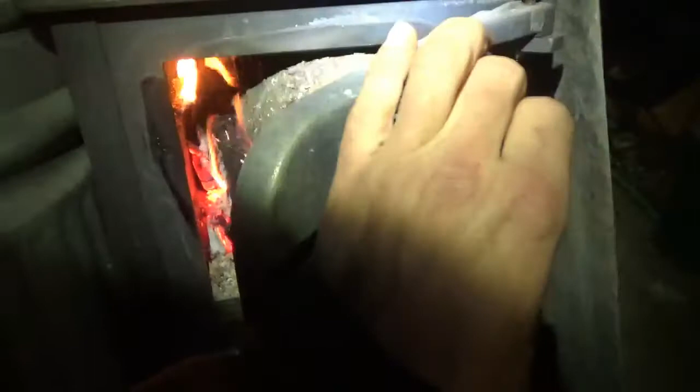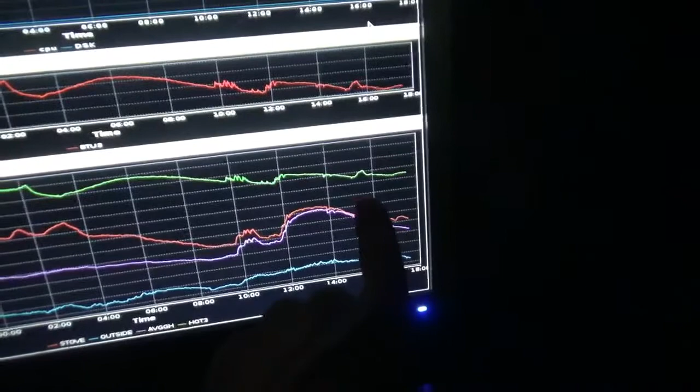Guess we'll just look at the chart here quick. I'll shut the headlight off. You can see here where I stoked it up, and you can see where the stove temp went up, and then where I throttled it back. You can see the temperature ramp down, and you can see the thermal mass kind of just hang out. I did tap some heat off to the tank. I topped up that secondary tank. And of course you can see we're down at around 17,000 BTUs in the storage right now, maybe 18,000.

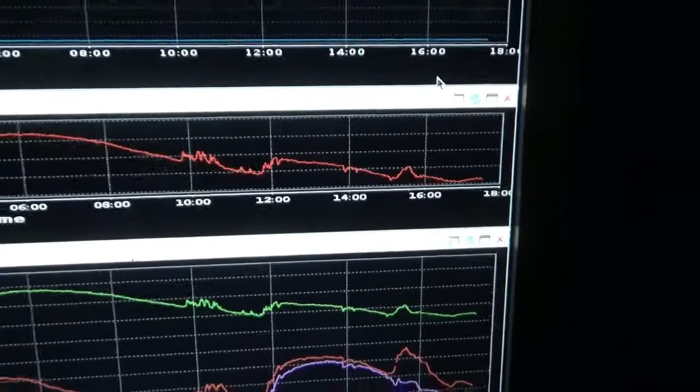And while I was in here this afternoon, I also put the new CPU and other core chip cooler heat sinks on the Raspberry Pi. You can see where I shut it down and brought it back up. You see that low temperature spot there? That was where it was shut off for a few minutes while I did that upgrade. So we should be pretty durable temperature wise now.

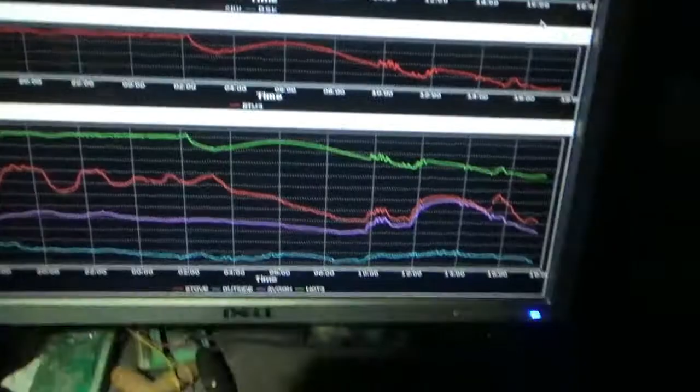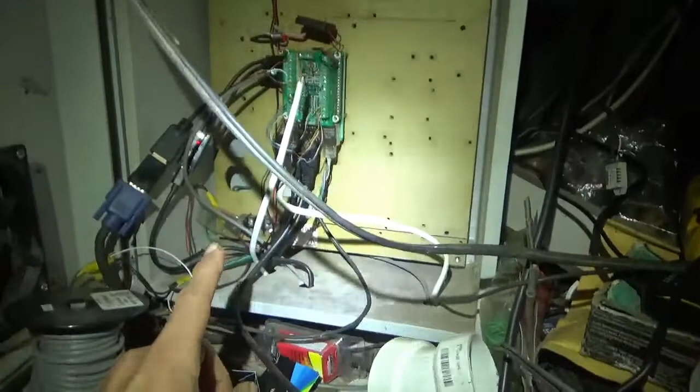Of course, there still is the accessory cooling system on here. There's a fan constantly on the processor, and there's a big booster fan to back that up that runs off of processor temp. And then there's a fan here in the box, although I never really seem to get this box closed. I'm always working on something. But when the box is closed, this fan will also provide ventilation.

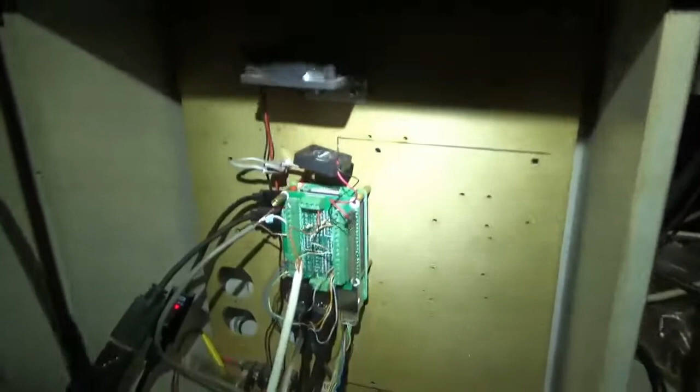And this is a really nice box by Hyperlink Technologies. I got this off of eBay for I think like 30 bucks, but new these are about 300 and something. They're crazy expensive, but it's got the louvered vents and all, so water can't get in. And I just like it for a box to mount all this hardware in. This box is going to fill up quite a bit as we evolve this whole system forward.

Anyway, what I was trying to show you was I'm about to crank the stove up. So I dropped a log on there. You ready?

Maybe what I'll do for you as this ramps up, I'm going to stay out here a few minutes and keep an eye on it, and then we'll scale it back to a normal heat production level. But I like to ramp it up good, get the whole stove and chimney hot, burn out the creosote, get all the fire brick and all the thermal mass of the stove up to a good temperature.

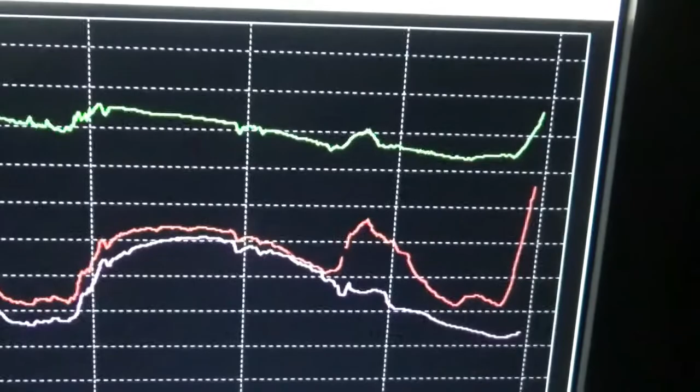And let's go have a listen to that stove now. And I can tell you there's a lot of heat starting to come off of this. And we still have the... here, I'll let you listen.

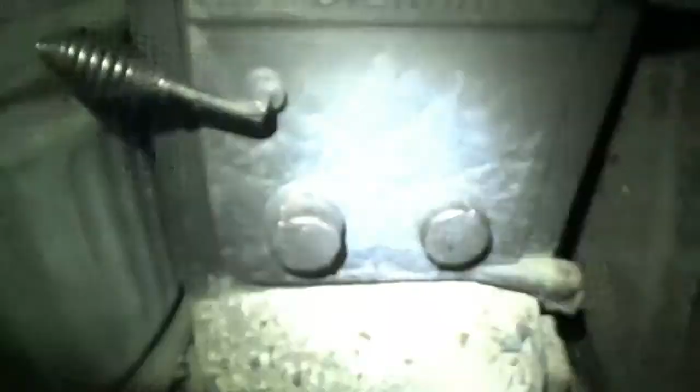And of course that's where the vents open. That's full throttle ahead, so to speak. So that's actually not even full throttle. That's maybe 8th throttle. But what we'll do here shortly is I'll close these vents down, and we'll watch how fast that heat curve continues to climb now that we've got a good draft going and a good coal base.

When I throttle these back to a normal burning rate, the heat production will ramp up tremendously. So I'm going to go ahead and do that now, but I got to put on gloves to close these because they're pretty hot at this point. All right. Close them both down all the way.

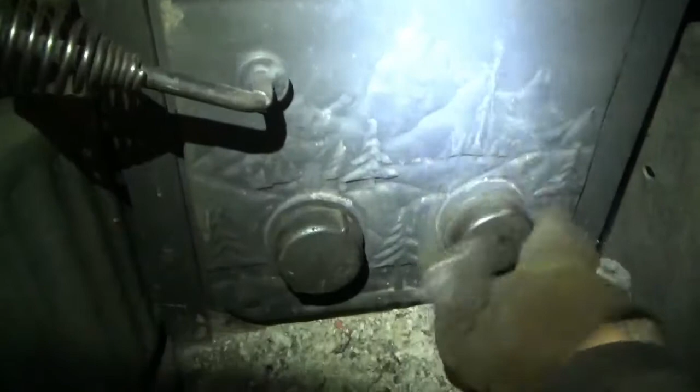Then we're going to come back half, one, half, half, one, half. That's it. And that's a pretty high burn rate. I rarely go any higher than that. And once I show you how much heat this is producing, I'll probably go back down to something like half on each side. Just a half turn open. It doesn't take much. This stove's a cranker.

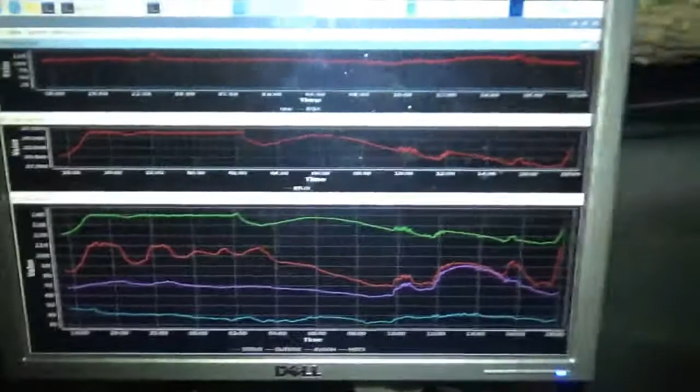Alright, let's go back and take a look at the chart quick. You can see it's 5:56 now. So we're literally 20 minutes from when we started ramping this up. And you can see stove temp is up around 120. Sorry, trying to bounce the headlight back and forth. Stove temp's up around 120.

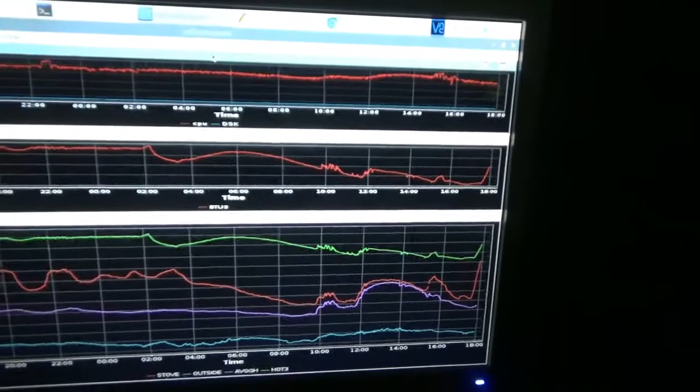Thermal mass temp is about 128, closing on 130. You can see we're storing about 22,500 BTUs in the thermal mass right now. 20 minutes ago we were down around 18,000, so we've already collected about 4,000 BTUs into that thermal mass.

I should mention, while I'm talking about the thermal mass, a real quick rundown on this. For those who don't know, there's a coil inside of here. For those who've seen this several times, I apologize, but I get a lot of questions from people who haven't seen other videos. So there's a coil in here. This is the main thermal mass.

There's a pump down here in the tank, and that goes through that coil, and we're able to transfer heat from this mass to this mass, or any other place in the greenhouse that we want. We're just transferring to this mass right now.

This is regulated by a script running Python on the Raspberry Pi that takes a look at the temperature on this sensor and determines what the temperature of the thermal mass is. Normally that script, I'd have sensors in here as well, and it would compare the difference in temperature between these two. When the difference is greater than a set limit, I like to keep around 40 degrees Fahrenheit, then it trips the pump on.

Right now, because I don't have the extra sensors hooked up since we took a lightning strike this summer, I'm only running a sensor here to monitor this. So basically I have this set to come on at 140 and go back off at 130. I'm probably going to tweak that down a little bit more tonight, because the amount of energy you can capture from the stove into this thermal mass greatly depends on how cold this thermal mass is.

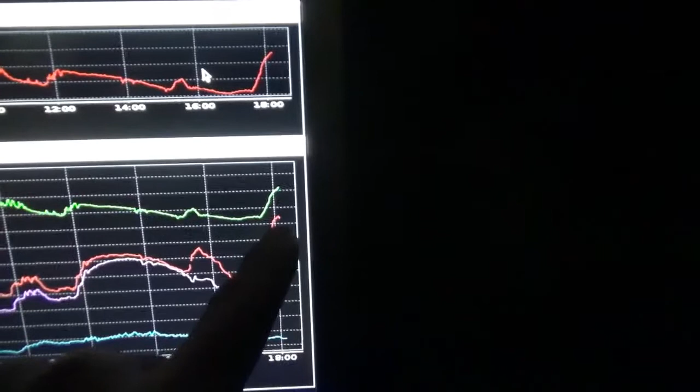All right, I think that's it for now. So here we are at 6:11, about 14 minutes later, and you can see where the stove temp started to level out, and actually it's starting to fall just a hair. But the thermal mass temp continues to climb at a pretty steady rate, and so does the BTU value here.

And what I'm going to do now—yeah, this is key too—you'll notice the greenhouse temperature is now climbing. We'll just follow across here for you so you can see.

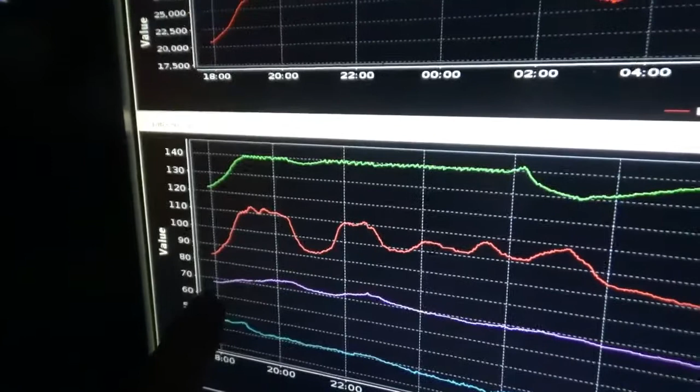It's about 66 degrees or so here, and I could feel the difference. In the last couple of minutes in here, it was still a little bit chilly, and now I'd need to take off my jacket if I want to stay in here much longer.

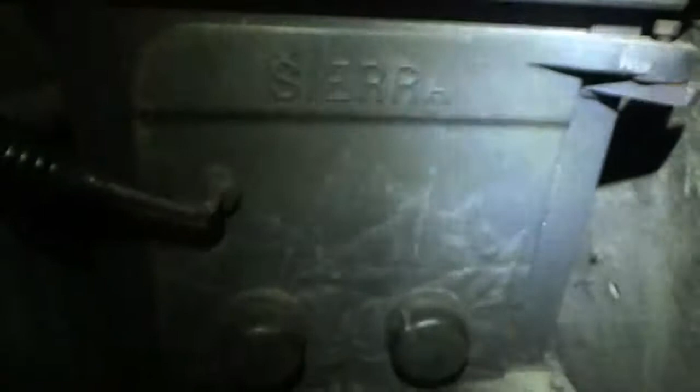So interesting to watch those trends. Like I said, I dialed that stove back to one and a half and one and a half. Now what I'll do is dial it down to three quarters, and we'll wait a little bit and I'll show you the chart again.

This thing is starting to make a pretty good bit of heat in here, and you can see it's actually not even stoked all that well. I really should shake those logs up a little more, but whatever.

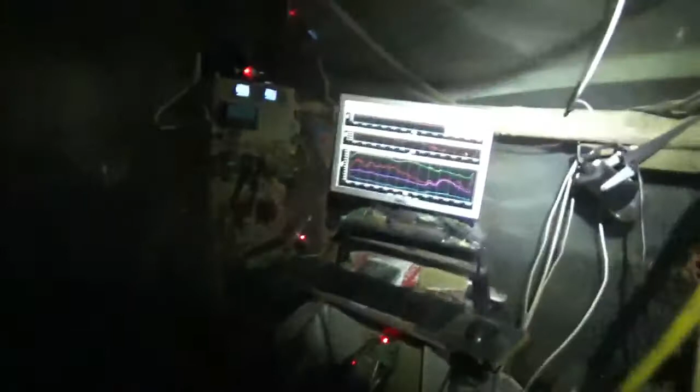So now we'll go all the way in again, back out half, three quarters, half, three quarters. That's it. Make sure our gate's tight. We'll go back to the chart in a minute here and monitor what happens.

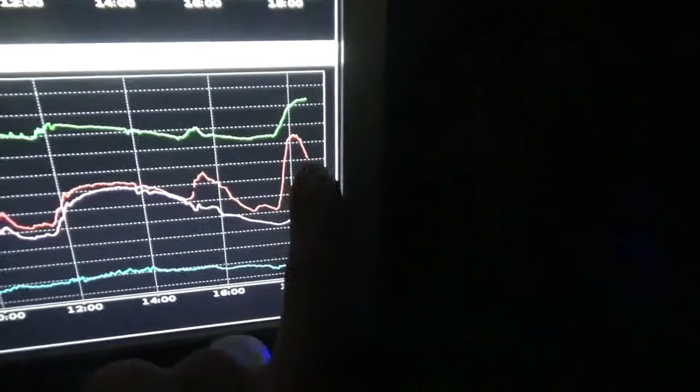Right, here we are, 6:30. This is about an hour after I started this whole video. You can see stove temp dropping back off, coming back down to a normal operating temperature. For comparison, I'll take you back to last night when our settings were about the same.

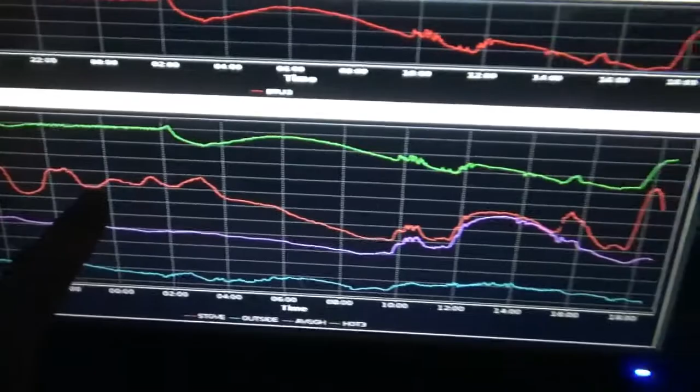You can see we're going to regulate back here again, just like here. We have a nice flat temperature line in the greenhouse, relatively steady heat production, and of course you can see the thermal mass being managed a bit here, with the swing going up in the daytime with the sun radiation and back down as temperatures cool off.

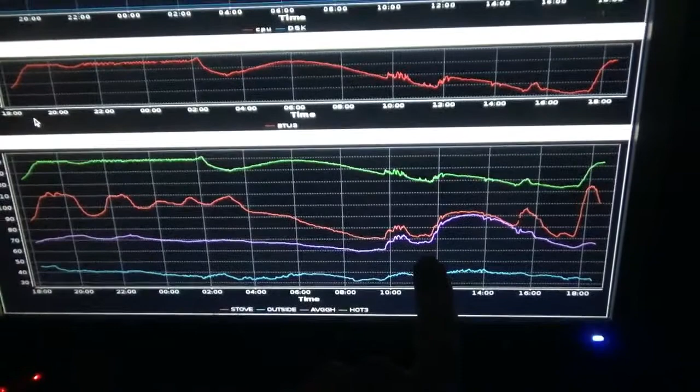You can see here where the vents open and closed a bit. Where the vents open, you can see the temperature drop dramatically. I probably did not even need to leave that vent script operating today. We wouldn't have gone above a dangerous temperature in here.

And then you can see up here the thermal mass is relatively level at this point. So we're producing heat, radiating some through the thermal mass, but not creating a tremendous amount of excess heat right now. This dynamic will change a little bit when I add the coils down under the beds.

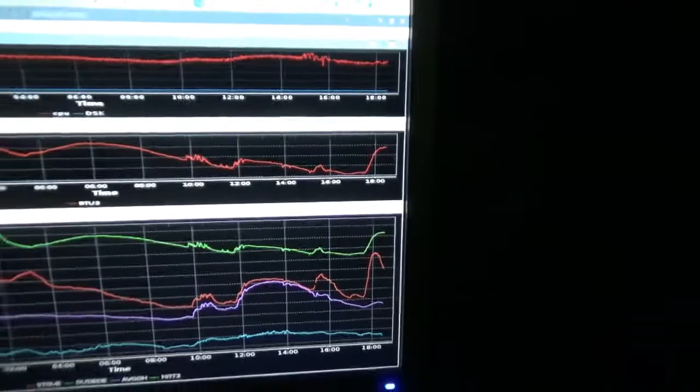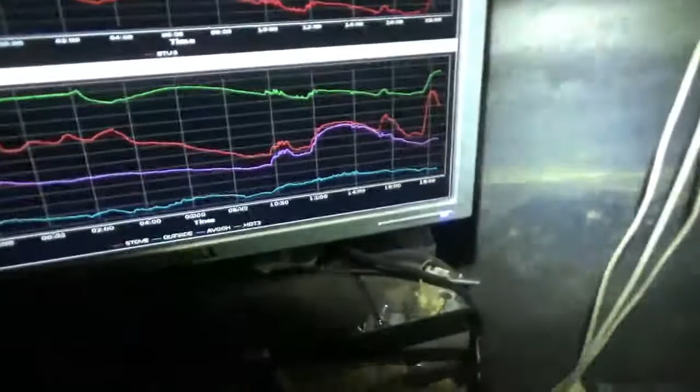As I've mentioned before, I'm going to put some kind of coil system underneath this bed here, and I might also do this bed, although I might just use a couple of barrels here as thermal masses. I'm still working out the upgrade details in my head, plan-wise, but that will help. It'll take a lot more heat off the system, so we'll have to run the stove's throttle higher to keep up initially, until we get all that thermal mass up to temp, and then it'll take less heat to maintain temperatures in here.

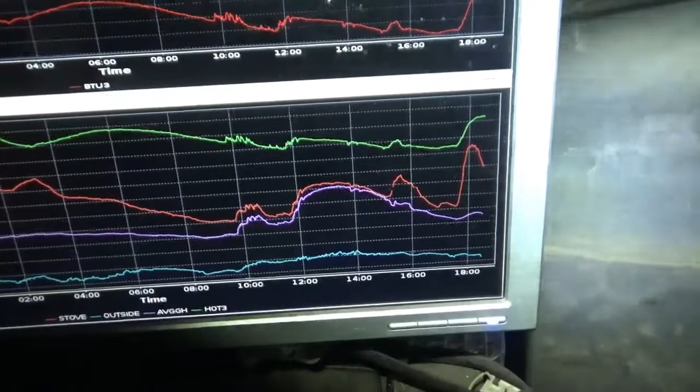So anyway, just thought I would do a sort of walkthrough of starting the stove up, and how that relates to the thermal management stuff I've discussed before. I think I may make this part 6 of the series, even though it's not really a deep explanation. It's a good practical walkthrough of everything I've talked about so far regarding thermal management.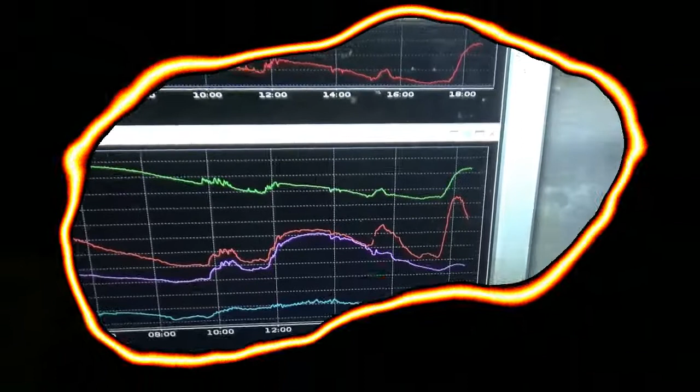Just having to be outside looking at upgrading insulation stuff and tightening the greenhouse up for the winter. Turned around and saw the moon rising through the trees. Almost looked like a distant campfire at first.

I guess this will be part 6 of the series.